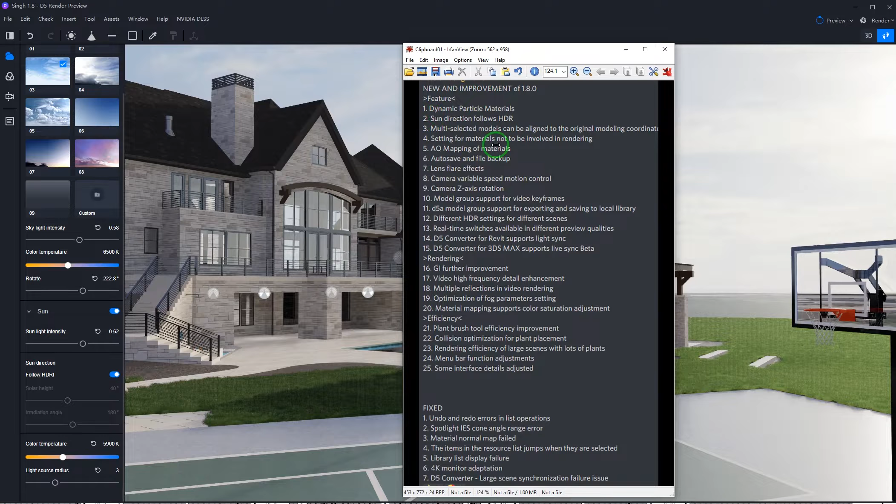But in the new version, there's a bunch of new features. The main headliner, I guess you could say, is the new dynamic particle system. So they have been working really hard to build a whole new system to support particles. It's going to be, from what I'm hearing, snow, rain, fire, waterfall, and fog.

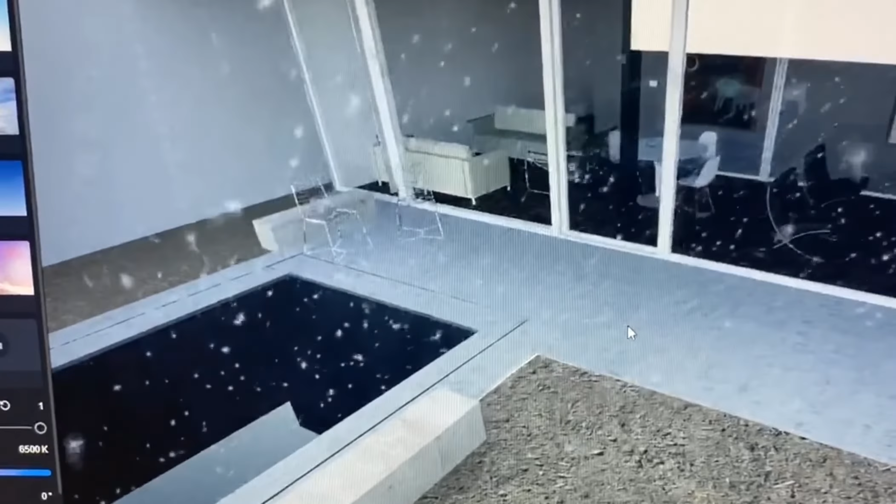So I did get a little preview of what the snow was going to look like. Let's see if I can show that to you guys. So this is what the snow is going to look like. Thought this looks pretty good. Very convincing. Oh, fallen leaves is the other one that I saw they were going to add as well.

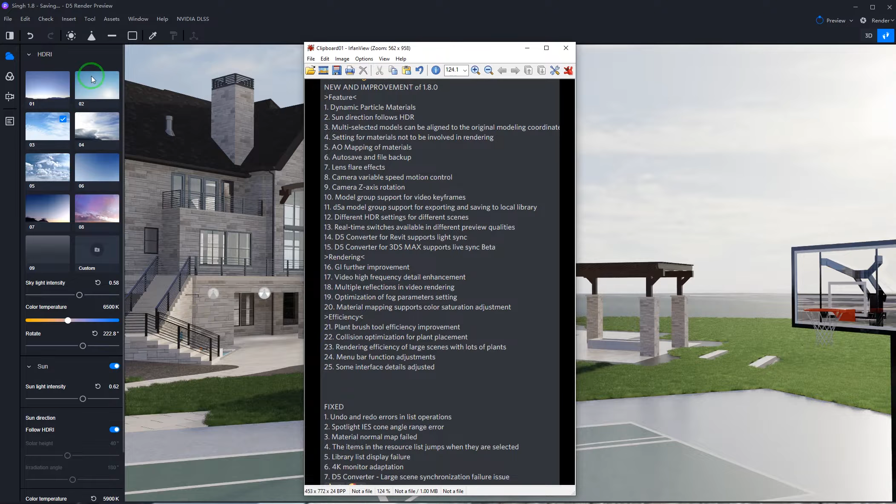And we'll just run through the list really quick. So we have the sun direction now follows the HDR. So they've basically redone the whole sky UI here. There's no more time of day slider. They've simplified things to be really just a matter of turning on follow HDRI here, and now you can just select your HDRI, rotate it, and it's basically all you have to do now.

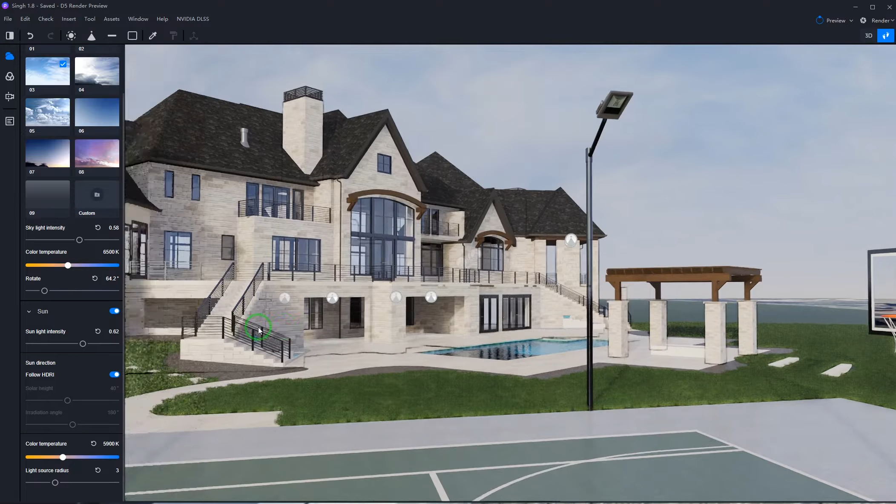Much cleaner, much more simple, and you should get better results because direct lighting and the indirect lighting are now going to match up. One of the other features is you can now save your HDR with your scenes. So that's super helpful. As I change scenes, you can see that I have them saved with different lighting conditions. Couldn't do that before, so that's going to be helpful.

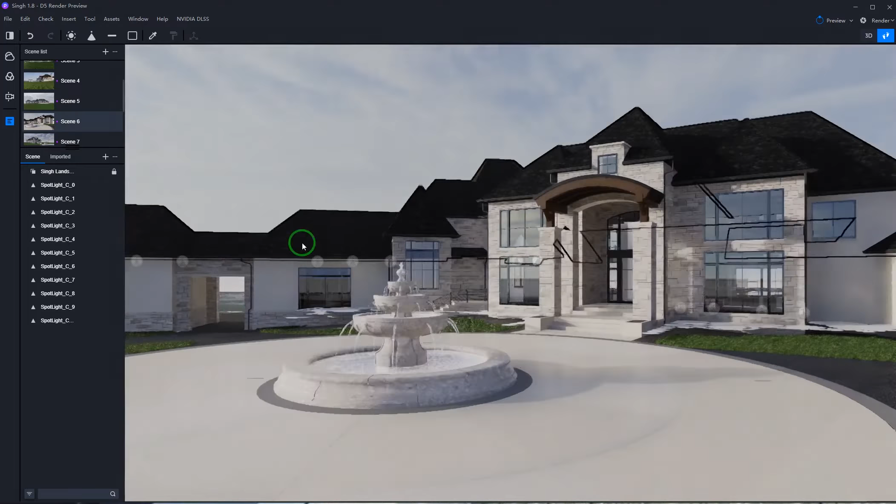Hopefully they get it to the point where you can batch render day and night all in one, maybe overnight or something, so you can set everything up, go to bed, render everything out. It's always been frustrating that you have to do day and night separately, so hopefully that helps with making that easier. Just keep going through the list here.

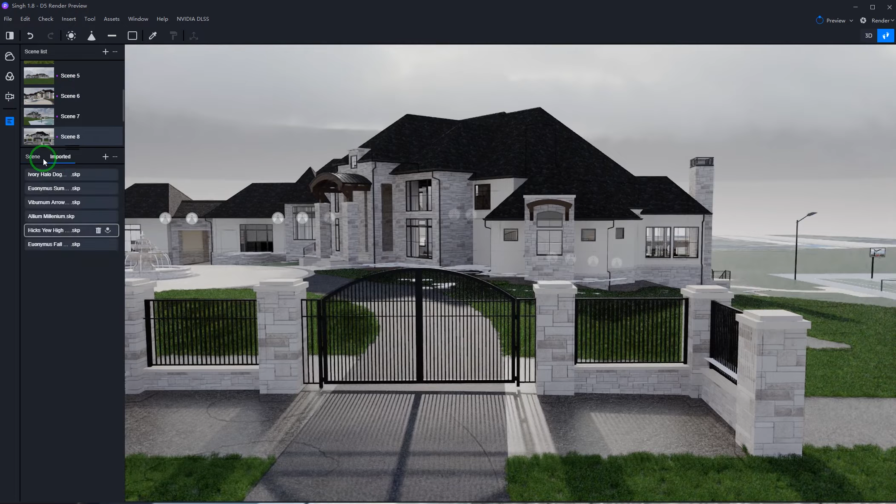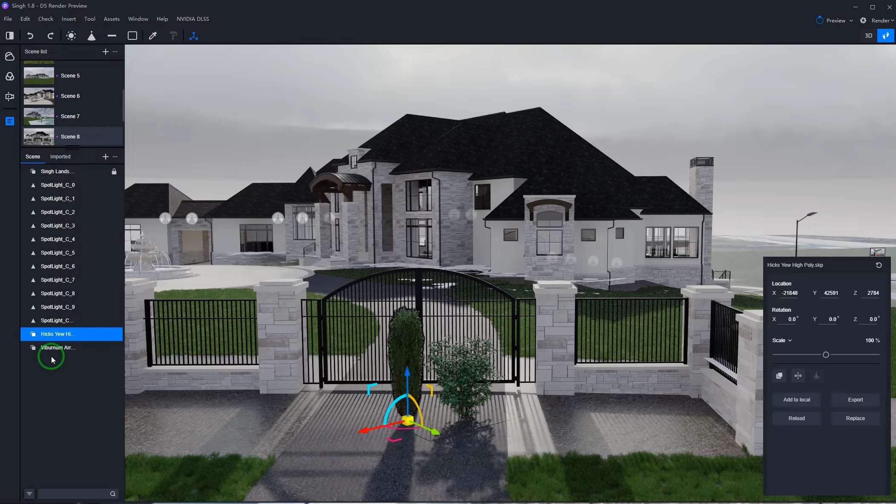Now multi-selected models can be aligned to the original model coordinates. Basically what that means is if I grab a model here, drop it in, and let's grab another one, drop it in. If I select both of these here, hold shift, select both, there's a button here in the object dialog that is an align button. So now I can align those two together, and basically whichever one you select first, the other one will align to. So if I select the yew first, the viburnum will align to that.

So settings for materials not to be involved in rendering. Yeah, there's a new option here. I don't think it's turned on yet, but it's under the custom material type. Custom, if I go to the very bottom, I can now toggle this off, so it should become invisible. Like I said, it's not. Okay, so it will be visible, it just won't be involved in the rendering of the lighting. So it's just hiding it from the ray tracing itself.

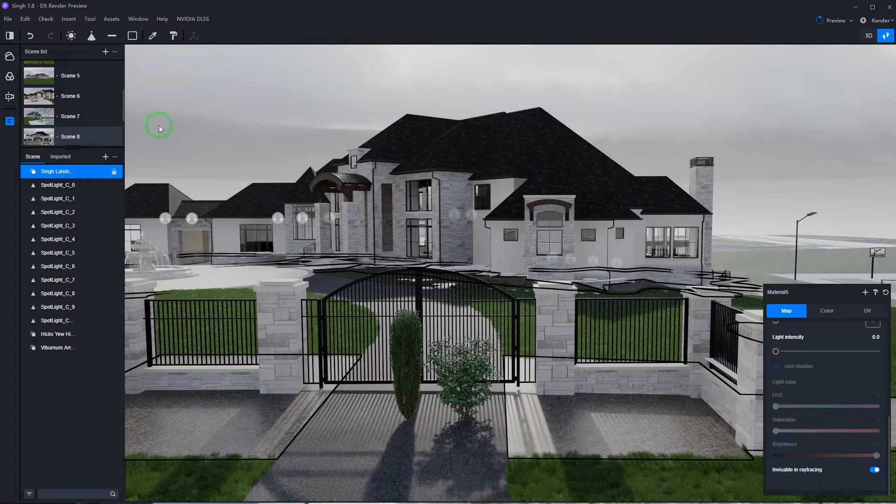We now have an AO mapping option. So I have an AO map on the wall here. So you can see if I turn that off, it basically hid the joint. And now if I turn it on, that joint becomes more pronounced. And I'm using this map here, which was kind of my bump map. But basically AO is ambient occlusion. So that will help the areas that are occluded and add a little bit more shadow detail. So we now have autosave, which is great.

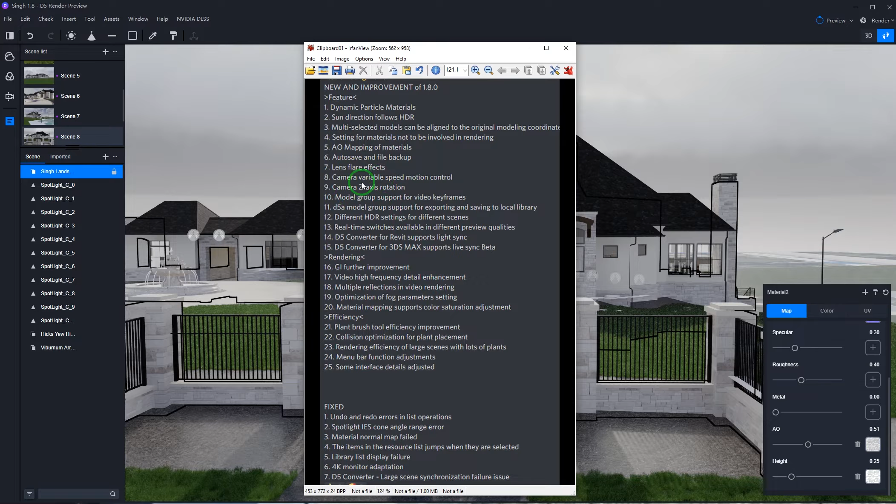Lens flare effects, I don't think those are added in the version I have. Camera variable speed motion control, so that's in the video settings.

So now we have camera speed control, so we can ease in and out. So we can either go linear or ease in and ease out, or both. Select them separately or select them both, which is really great. It was a little bit sharp to go from one camera transition to the other. It was a hard transition. Now we have a Z-axis rotation here.

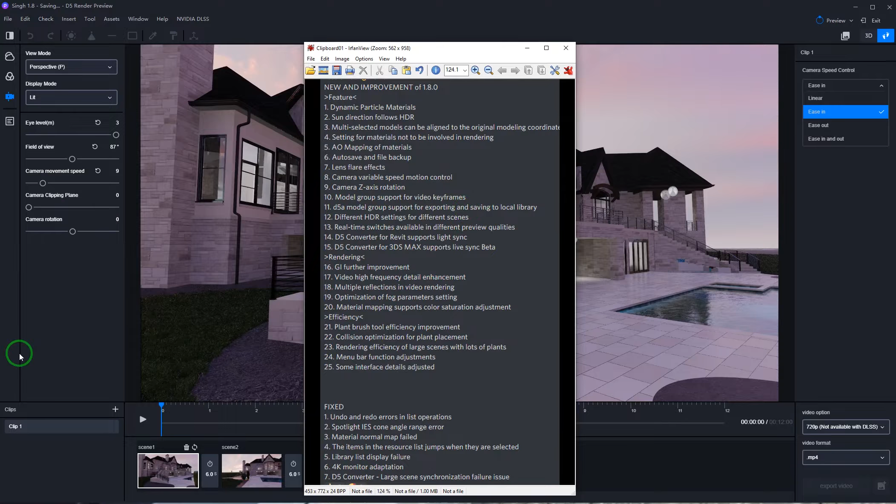Model group support for video keyframes. If we would have things grouped here, and we would group these. Let me just drop in two things here. Go back to my scene, hold shift, select both of them. Now if I Control G, I group them. Plants. Alright, so now I have some options here.

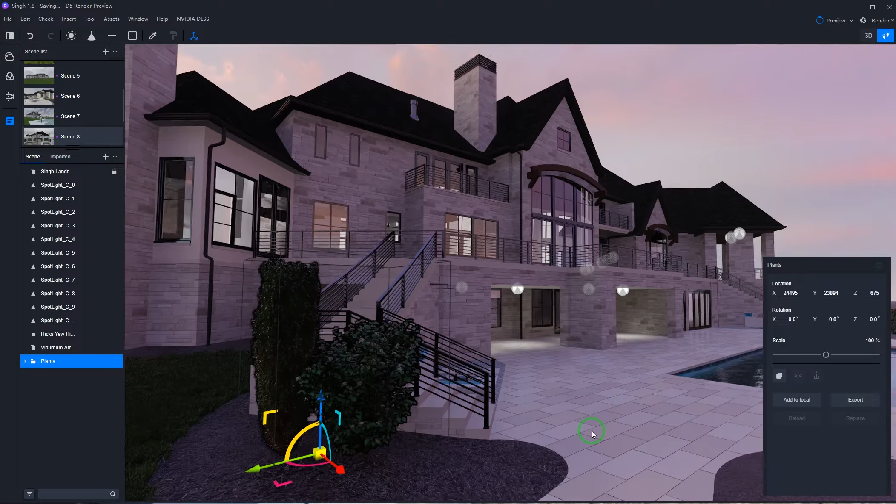I can export these. Now I can grab the group itself and I can export that as a D5A, and I can save the group now to my asset folder. So if you had furniture that you have arranged a certain way, you could export them all at the same time, which is really helpful. If you made a planter with plants in it, you can export that as one object, which is really super helpful. But it's also now visible to your video rendering.

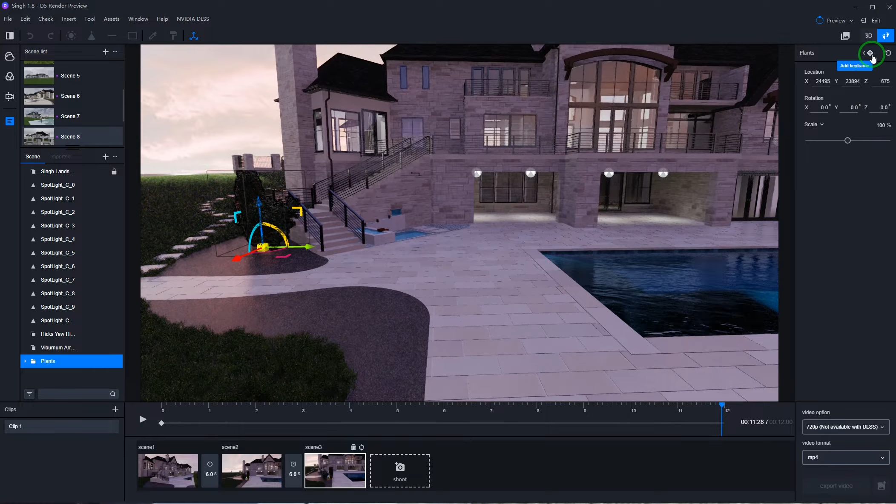So up here, if I am in my video mode and I click that group, I now have an option up here to keyframe the group. So I can add a keyframe here, move this down the timeline, add another keyframe and rotate it, move it, and you'll see now that that'll move and rotate. So you could do that previously, you just couldn't do it with groups, and now you can do it with groups, which is a great option. Like I said, we can export groups now.

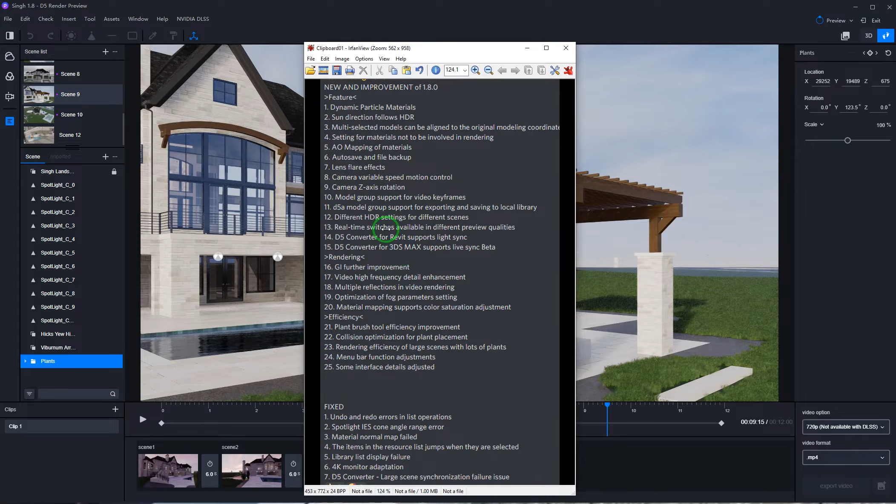Rendering improvements, they've improved the GI, improved some video detail. There's multiple reflections in video rendering, optimization of fog parameter settings, material mapping supports color saturation adjustment. So the fog settings, I noticed there's a new Tyndall effect down here, which kind of gives you better sun rays, light rays. As far as the saturation, I did notice that that works now as expected. It didn't before. So now if I turn up the saturation, you can see that I'm getting a fully saturated color.

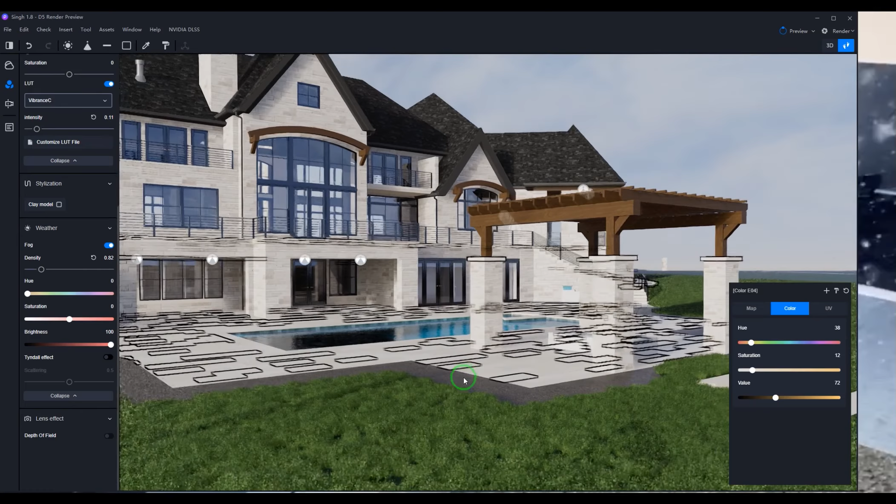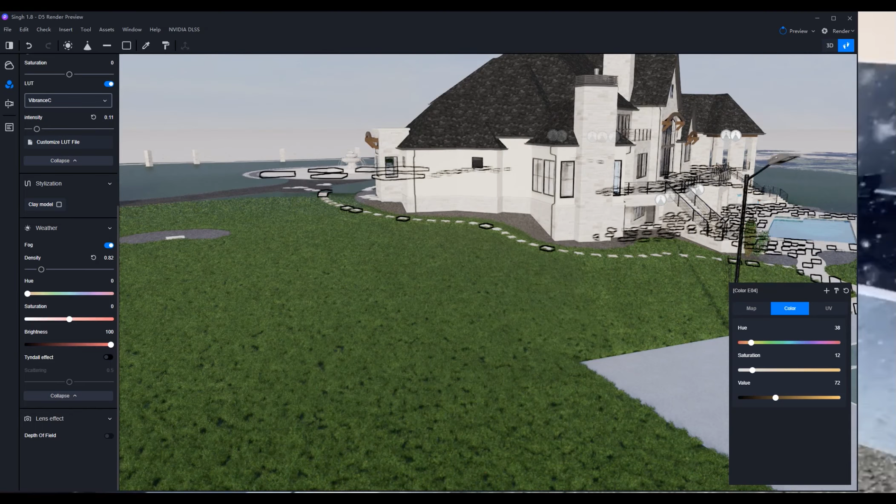So there's been efficiency improvements in the paintbrush for the grass. So you can see if I back up here, the distance from the camera has been lowered. So the grass isn't showing up here, where if I would render this, it'll render all the grass, but just in the viewport, we're getting more efficiency here. There's been some improvements to the collision for plant placement, rendering efficiency of large scenes with lots of plants. So I haven't tested that yet, but I'm hopeful that that's going to save some render time, because as landscapers, we use a ton of plants. So just some bug fixes that they've done in this release as well.

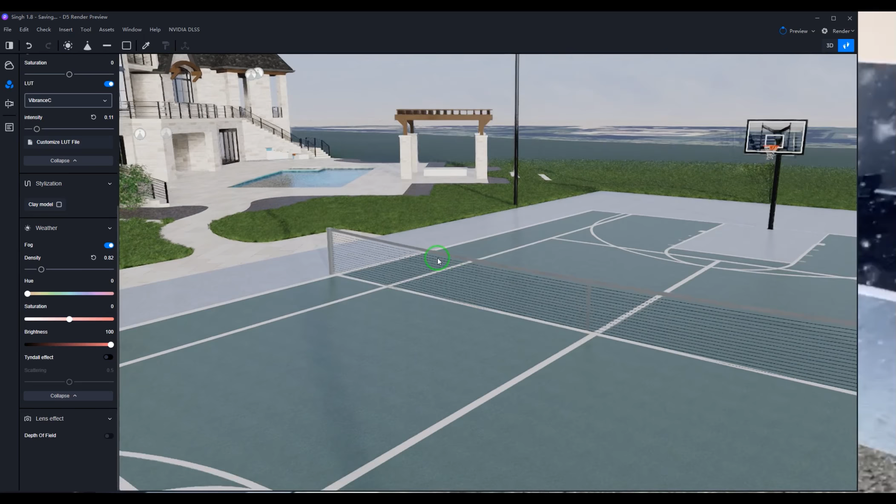So all in all, that's pretty much it for 1.8. As I get the particle stuff showing up, I'll show you guys what that looks like. And I'm curious most of all about the fire, so as soon as I see it, I'll make another video and I'll show you guys what that looks like. I'm dying to see what the fire looks like, especially. So as soon as I know, you'll know.